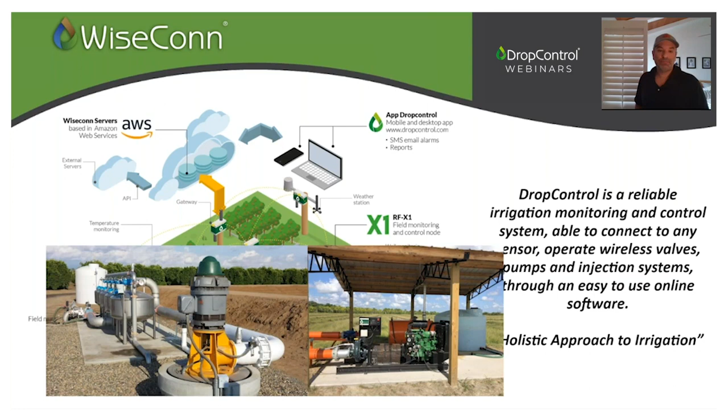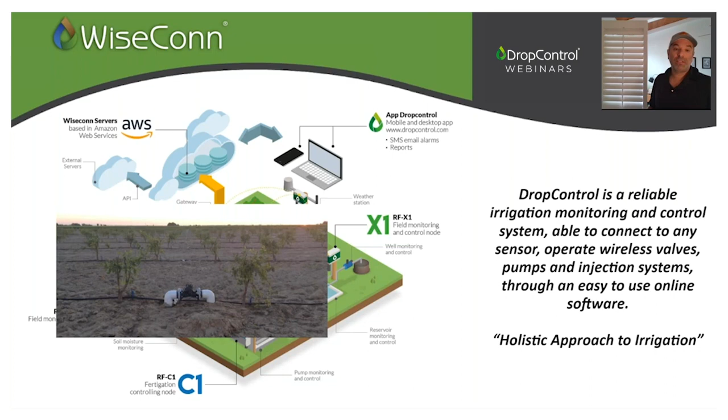The system is capable of taking control of the pumps, either electric or diesel, monitoring your flows, pressures, backflush control, reservoir level control, groundwater level monitoring, energy consumption, anything related with the pump and the filter station. Then, in the field, crucial for efficient irrigation management, valve control and valve feedback, which is key to making sure the system is operating reliably.

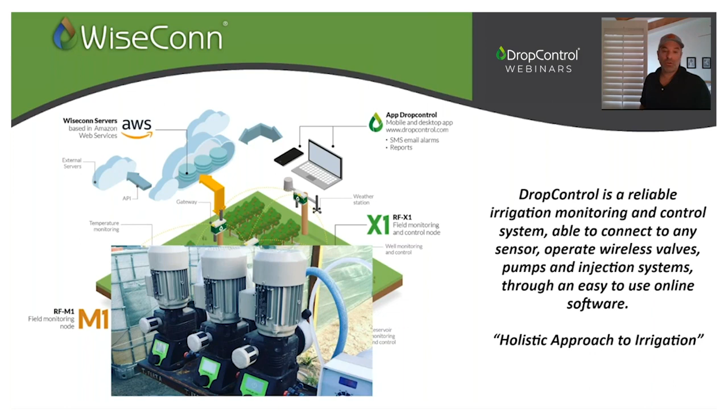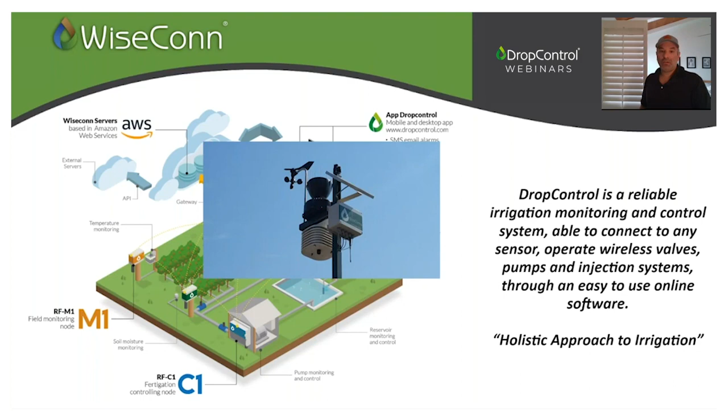Fertilizer injection is very popular nowadays, getting more traction on precise nutrition and fertilizer injection, acid injection. Weather station - again, we're determining and controlling - so we need knowledge of ET, rain, temperatures, all the information relevant for irrigation decision making, including soil moisture sensors, a key part of the irrigation decision making. And then plant sensors in any shape or form - we've worked from leaf temperature sensors to dendrometers, fruit size sensors, NDVI sensors. There's all sorts of sensors on the plant that help make an irrigation decision better.

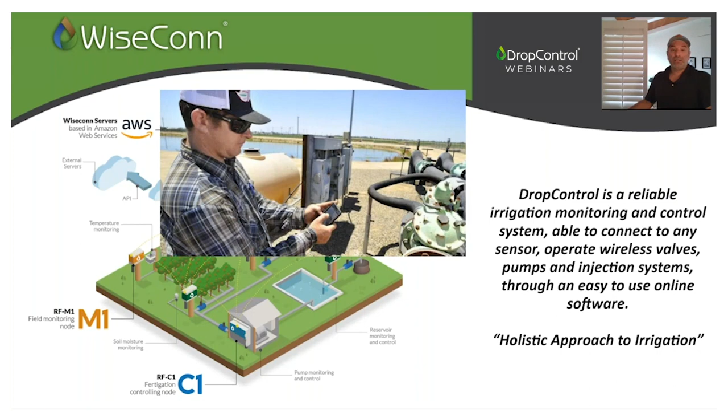And all this from a centralized control on your phone, on the cloud, through a web page. But we also always provide an override, a local alternative. These technologies rely on radios and cellular communications, and the capability of controlling it locally and overriding the cloud lets you irrigate even if the cellular is having issues - Verizon is down, or AT&T or T-Mobile, any preferred brand - then we need to be able to operate our irrigation systems locally.

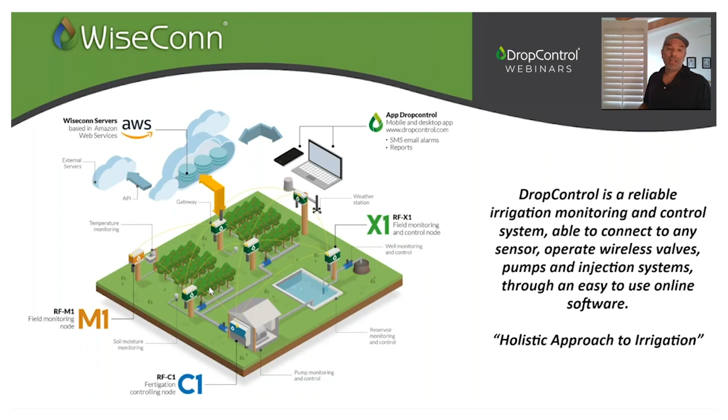Now how this works is we deploy units throughout the field that are connected to the sensors, to the actuators, and they take control of the system. They communicate between themselves through radio, and then one of them, which we usually call the gateway, is connected to the cloud. This unit syncs the cloud with the field - it does not need to be constantly connected or in communication with the cloud. The logic and hydraulic intelligence of the network we've developed and patented is what allows the system to operate independent from the cloud and collaboratively between themselves in order to operate reliably without human supervision.

So the solution is composed of two parts, the hardware and the software. In terms of hardware, we have three models. We've got the M1, which is the monitoring node, and the X1, which we call the flexible node - that's kind of our bread and butter, and we've deployed thousands of units of it. This is the unit capable of monitoring and controlling devices in the field.

And then most recently, we've deployed in the market our C1, the pump controller node, which has more processing capabilities. It's got Bluetooth connection, filter flushing capabilities being released now, and a screen is also coming into the market for local control for those operators that don't have a smartphone. It's got very high fertigation control capabilities in order to do precise nutrition injection for specific crops, substrate, or hydroponics and other applications.

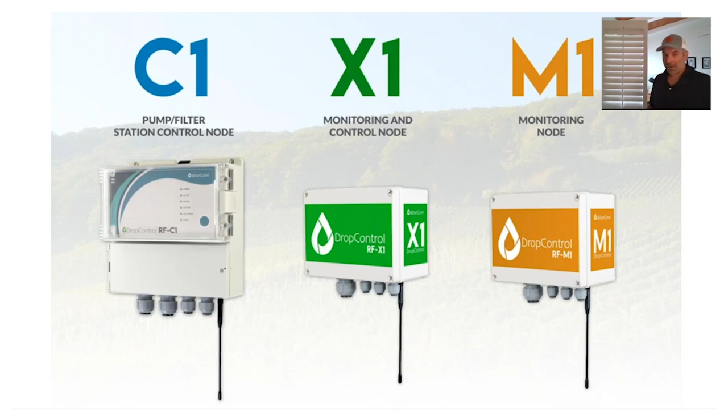So the M1 is the monitoring node. It can be either radio or cellular, so it can go straight to the cloud or be part of a radio network. It can connect to multiple sensors of different protocols. Our system is bare wire, open protocol, so you can connect any sensor to them - you just go in through the cable gland, bare wires into the terminal, so you don't need any special connectors. You can use existing sensors or infrastructure that's already in the field.

We've got a variety of protocols like SDI-12, RS-232, digital, and analog 4-20 milliampere, for example, already included in the node to connect all sorts of sensors on the same unit. The unit incorporates the battery, the solar panel, and the mounting bracket, so you don't have to incorporate a separate power management solution. All of them come with their communication device, solar panel, and battery.

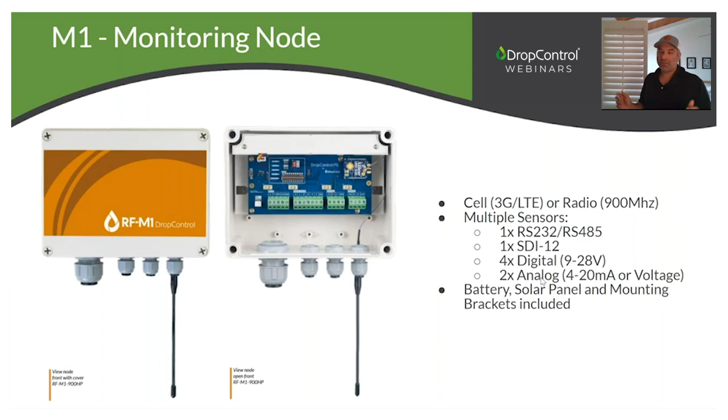Then we've got the X1, which is the flexible node. All of them come with a radio. They can all be part of a network, and they can also be a gateway, so they can be both radio and cellular. This one can be a gateway to the cloud.

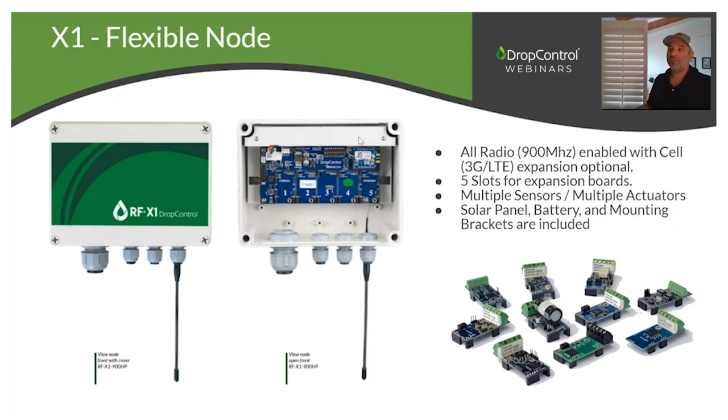It's got 5 slots on it, so you can install different expansion boards with different communication or actuation protocols, including 12-volt DC latching relay control and sensor protocols. It's very flexible in that you can connect multiple sensors and actuators. In this case, the sensor also comes with its own battery, incorporated in the top part. It comes with a solar panel and mounting bracket, so it's ready to go out of the box.

And then finally, the C1, the controlling node, as I said before, is a more intelligent device. It's got more capabilities—it can be radio or cellular or both. It can expand up to 70 IOs. It comes with 10 inputs, 10 outputs, and some analog and serial inputs in order to communicate with VFDs, energy monitoring systems, pressure transducers, etc. It also has expansion modules that allow the designer to incorporate and expand the same unit up to 70 IOs and control up to 5 irrigation systems.

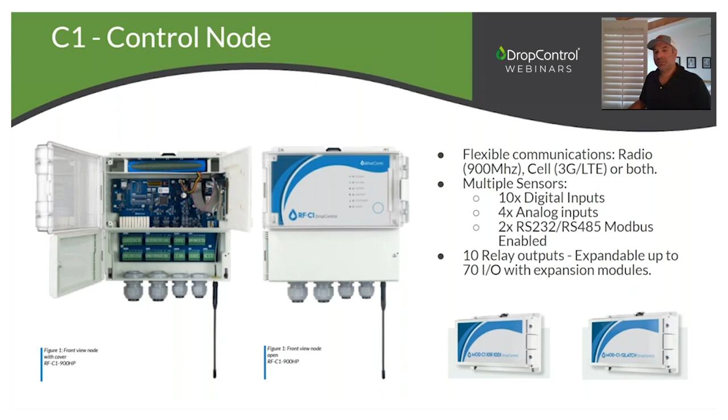And then, of course, we have all the accessories. This is crucial—you're a one-stop shop and have everything needed to get your platform running, so you don't have to go buy antennas or batteries somewhere else. All that is included in our catalog, and you can buy high-gain antennas, extra batteries, extra solar panels, or anything you need to get the system working properly.

In terms of communication, we have bidirectional mesh radio network communication on a 900 megahertz spectrum, so we have a very flexible communication port that we can replace, from 900 to cellular to LoRa to Sigfox, narrowband IoT, you name it. Right now we feel very comfortable with 900 megahertz because of the speed and uptime of the protocol, and then LTE in the US, mainly for the cloud connection. In some countries like Mexico or South America, we use 3G, which is the most stable cellular connectivity in the field. The radio communication has a 2-mile line-of-sight range.

Each node works as a repeater. It's true mesh—they self-heal and repeat, so you can reach up to 20 miles with 10 repetitions. The cell provider can be any provider available on the ranch, because the LTE modem is configured to operate with any of the major carriers.

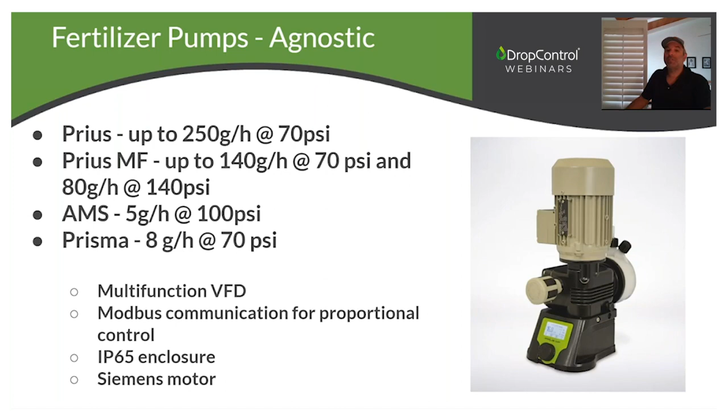In terms of the software, we got the field, as I explained before, connected to the cloud, synced through the cellular network. When you're in the cloud, we have our own app, which I'll briefly show. We also have WOS, the WiseConn Open Service - a free app that our installers and integrators use for configuration and testing. And we have an API to connect to third-party platforms, which has become very popular lately. We've been doing interesting integrations, incorporating the brain into the solution. We don't provide the brain, we provide the remote control, but when we partner with these API companies, we bring in prescriptions and recommendations and close the loop, executing those recommendations in the field. That's the latest thing happening in irrigation automation.

On our side, we have an app. It gives you the bird's eye view of the map of the ranch, your soil moisture sensors, evapotranspiration, irrigation information, and details on what has occurred in the field. You can, of course, schedule irrigation from the app. It also gives you notifications, so a lot of people rely on notifications telling them when the pump started, when it stopped, and if there are any alarms or anomalies in the field.

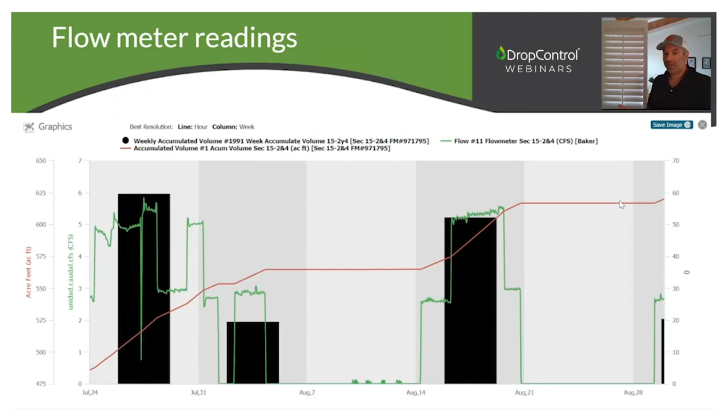And then, of course, there's all the sensor feedback information and flow meter readings. This is a big farming operation monitoring their flows in CFS. In black, you can see the accumulated volume in acre-feet per week, and the red line shows the totalizer of the flow meter in acre-feet, so I can match what my meter tells me with what the software is showing.

We also monitor pressures, doing constant distribution uniformity tests on the main line. By the filter stations, you can actually see the backflushing events. Then on the submains, all the way down to the drip line, especially at further spots or where we designed the system to have lower pressure.

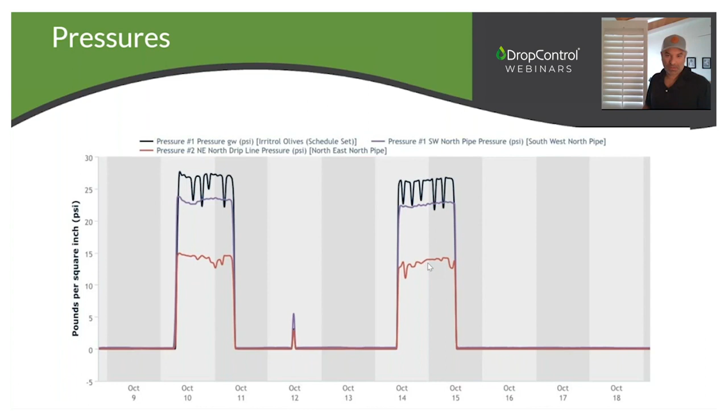If there's a soil moisture sensor or a valve there, you're going to add a pressure transducer to monitor how the pressure is distributing throughout the irrigation system. So moisture sensors for irrigation decision making, determining how long and how frequent you're going to irrigate, and then alarms, getting alarms, texts, emails, even phone calls for frost control.

So if there's a frost event, especially if you're controlling it through water and irrigation as your frost control method, then the system can give you a phone call and wake up anybody that needs to be waking up during the night if they're not ready for the frost control event.

And then finally, on the software side, as I was mentioning before, the new wave is API integrations. We've already integrated with 7 companies that provide different services and solutions, getting to the field through our platform. Companies like Phytech, Semios, Powwow, and FarmItRx provide irrigation prescriptions based on different methods, models, algorithms, and sensors.

They come out with a prescription and send it into our system, and we automatically define a program, a schedule, and then execute it in the field.

And then on the other hand, we've got companies like SWIIM that do water reporting for regulation purposes, or Polaris that do automatic demand response or energy management in order to pump water when it's best in terms of energy cost.

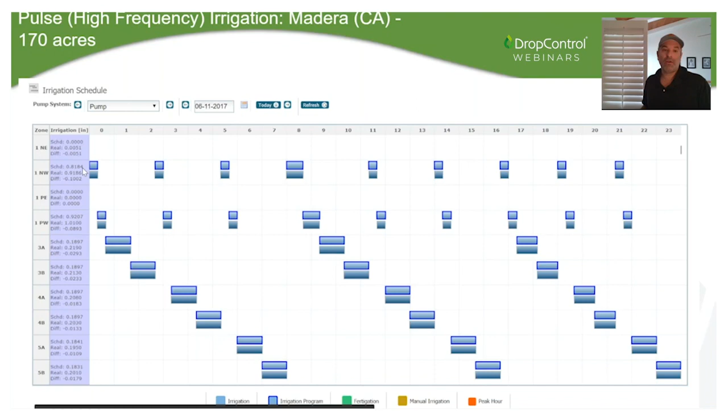So what they did is they started doing high frequency irrigations on 60 valves that they have on 170 acres, operating them several times a day - 3, 4, 5. Now they're even up to 10 times a day on their newer blocks. So this is one day where they were running the adult trees 3 times a day for an hour, and on the younger trees 10 times a day for 20 minutes.

What we've been seeing is that it's a very intense irrigation method. They're basically irrigating, in this case, the first 18 inches. So there's no water there in the deeper soil as an excess or as a backup, but it's very efficient in terms of use. So you're irrigating kind of like substrate, but in soil.

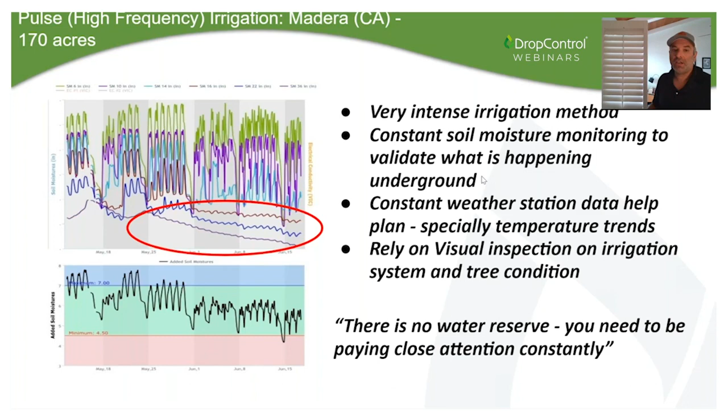Their soil moisture sensors here are very important because they allow them to have visibility of what's going on under the soil and adjust either the frequencies or the durations.

In this case, as I said, it was 170 acres. They're now running with 600 gallons per minute. They have 30% water savings compared to what they were doing before they started with this strategy, and are averaging 3,000 pounds per acre with some trees that are 30 years old.

On the other hand, the grower here experienced a big time savings because he didn't have to go out there and switch sets every time he wanted to change, especially if he was doing high frequency because he didn't have enough water, and that's the strategy he wanted to go with. Basically, it was a full-time job driving around opening and closing valves.

And then the final thing is it's even water - there's no ponding, there's no runoff. These guys are spraying 12 hours after they turn off the water. They're harvesting the day after they turn off the water. So yes, there's not a lot of water excess in the soil, so you have to pay close attention.

But on the other hand, it gives you very good benefits of being able to work on the field only hours after irrigating. And these are some pictures of UC ANR and the almond board visiting the field and validating that this irrigation strategy was successful. The trees were very happy and the water use was below the average.

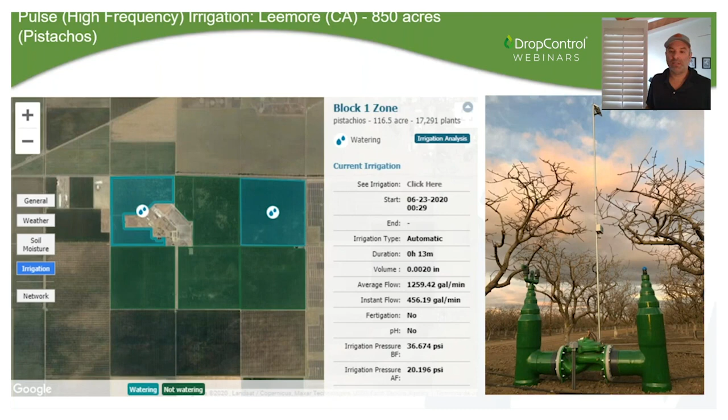So after that, other guys started to jump in with big blocks. This is an 850-acre farm that has 150-acre blocks, and they do also pulse irrigation. They went from once a week to twice a day, and what they've seen is a 50% water savings on their results. But most importantly, they improved their production by 38% on the off years. So now they have a very constant production on pistachios, and they're producing around 3,000 pounds per acre on average.

This is another example, out of the high frequency - now we go to per variety on almonds. There are different varieties, so basically automation allows you to separate the pollinators from the non-pollinators, and you can irrigate them separately when you're harvesting or shaking. So the piping and the design, of course, needs to be set up for this in order to be able to open and close the valves depending on which variety you want to irrigate at that specific time.

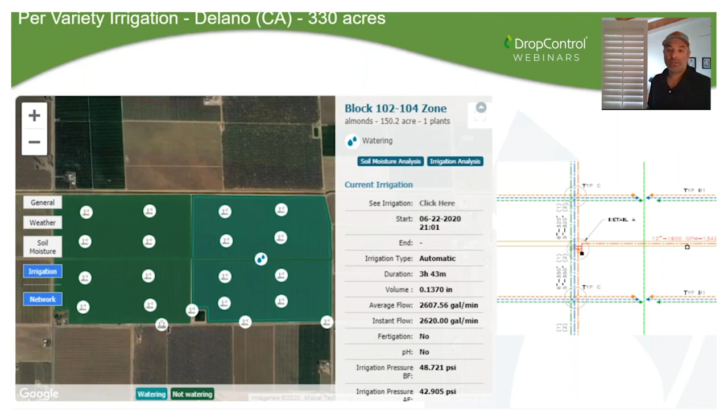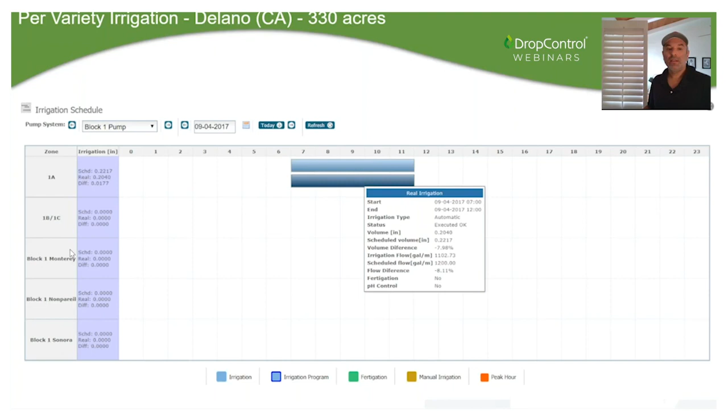So as you can see here, we have the blocks on the left, and these guys divided the ranch into two blocks, blocks 1A and blocks 1B, C, but then also they have block 1 Monterey, block 1 Nonpareil, and block 1 Sonora. So they have the capability of scheduling it to run as a block or per variety.

And just to be sure, this is a ranch that has 75 valves on it. So these guys decided to go with a pressure transducer after each valve in order to check that the pilots and the pressure regulation were constantly operating correctly according to their calculations, just by monitoring the pressure after each valve.

If a valve loses pressure and the pilot is not regulating accordingly, you can't tell until the trees start showing it. So just by being able to identify that change in pressure regulation, which happens ahead of time or as soon as it happens, you can correct it immediately, and the economic impact of that pays for the transducers, the service, and most of the system.

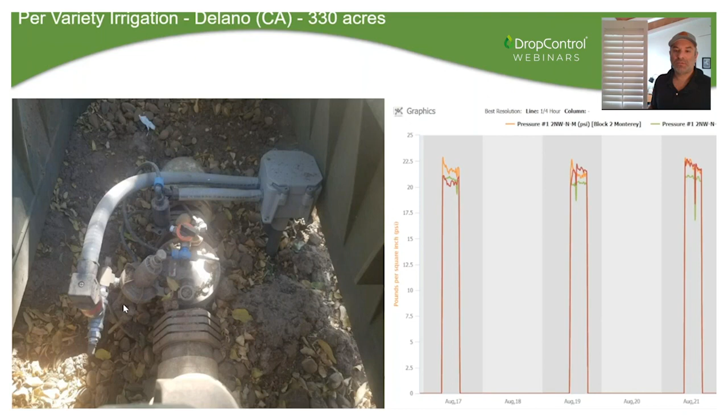This is another case that we've operated in the last couple of years: valve sequential operations in Winters, California. This is also almonds. In this case, we found that we had two pumps, a north pump and a south pump on this ranch. The main pipe was on the west. It was a big pipe, high velocities, and the variable frequency drives were connected on both the electric and diesel.

What happened on this ranch is that the filling of the pipe and the actual block was from west to east, so it took a lot of time. And the velocity of the water, given how big the pipes were and how it was designed, had pressures going all over the place. So what would happen is the operator would start the pump, open the first 4 valves of the block, and then when he needed to change the set, he would open the other 4 valves and then go close the first 4.

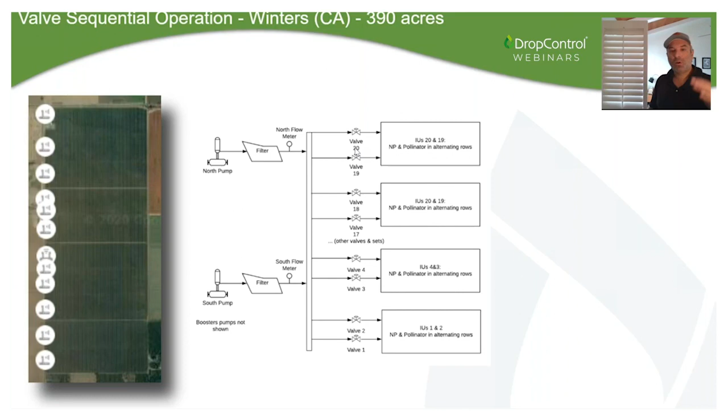So what started to happen in those cases is the pressure would drop, the VFD would ramp up, velocity of the water would go higher, and it would take up to 30 minutes to get back to a regulated pressure on the main, on the whole system.

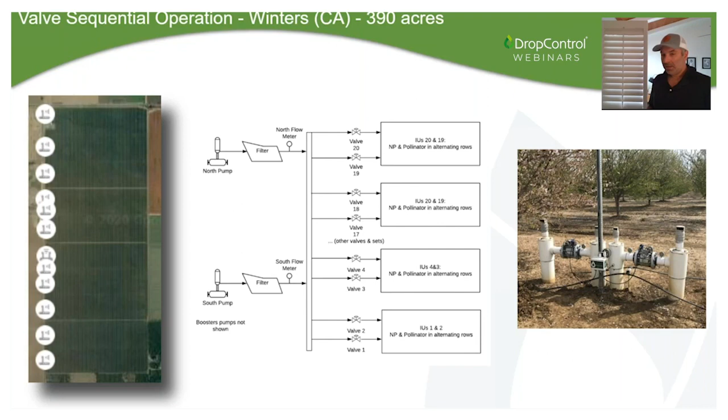And these people were looking into doing high frequency irrigation as well. They wanted to do 1-2 hour sets, and when you're doing that and you've got 30 minutes to stabilize your pressures, it doesn't work. So the field was not doing very well.

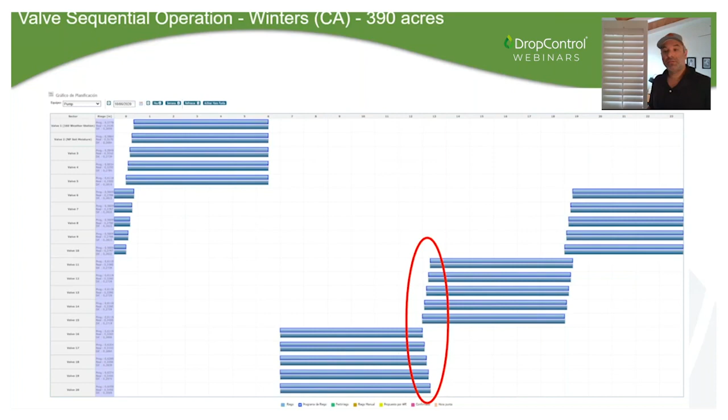What we decided to work out with them was a sequential operation, meaning you open the 5 valves and then start switching them one at a time. You open one and close one, then 5 minutes later open one and close one. That sequential operation allowed the pressures to stabilize and the system to always run at full pressure, which is what the emitters needed.

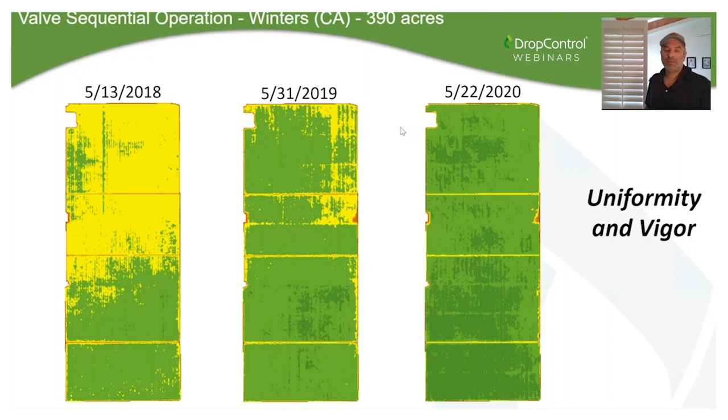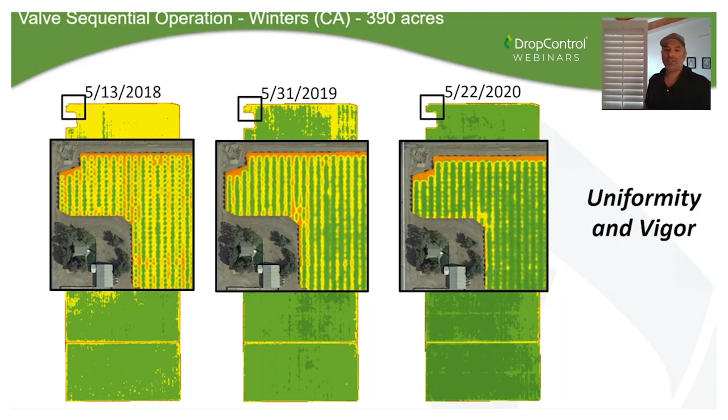This was installed mid-season 2019, and we can see the vigor today. This is an image from the last 3 years in May. It was absolutely incredible, and the ranch had very good results in terms of harvest. It was even, the canopy, everything. Really good results just by doing a tweak on the operation of the system, by incorporating automation, and the economic results were incredible.

So they had that capability and intelligence just by using one node in order to feed the water tank and feed the irrigation system, and of course control the valves in the field when they wanted to irrigate the 4 blocks.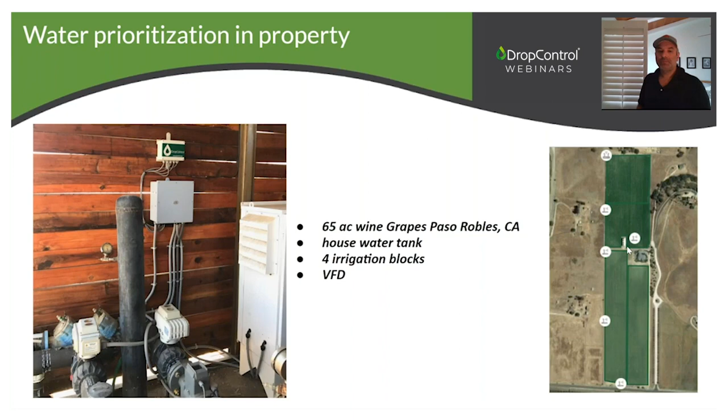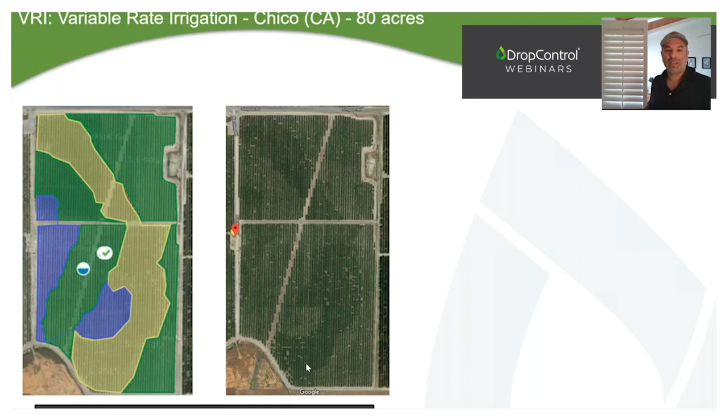Another thing we've seen, I was talking before about high frequency. The other good use example is variable rate irrigation, or VRI, where we've been seeing growers, especially on their new setups, build their irrigation systems and ask the installers to design the irrigation system matching the soil type. You can see on the sandy soils that yellow stripe going across the field. And here on the picture on the right, from Google Earth, we can see that block had been irrigated right when the picture was taken, so that's why it's wet. So the irrigation system matches the soil type.

That has proven to be a very good investment. It does not cost a lot more to install an irrigation system like that, it's not a dramatic difference. We've seen everything from 10 to 25% difference in the cost of the initial investment, but the results are incredible. You're now irrigating your sandy soils with high frequencies and shorter durations, and your heavier soils with longer durations and lower frequencies, and your ranch, the trees, and the crop basically look even. This farming operation started off with 80 acres and then converted around 1,000 acres to VRI because of how well it performed in the field and the trees.

This is another example of a strategy using automation and monitoring, again a complete water irrigation management approach. This is walnuts in South America. Some of these are actually planted on hills, and that's another topic - if anybody wants to talk about that or has questions, I'm happy to answer outside the call.

What these guys did, or what we worked out with them, was basically changing their irrigation strategy on post-harvest. Right now we're in the middle of post-harvest. What I've seen is a lot of people trying to put a lot of water on it because of the stress the trees went through for shaking. I've seen a lot of people wasting water because they're running long runs, which only makes the water percolate and not really get used by the tree.

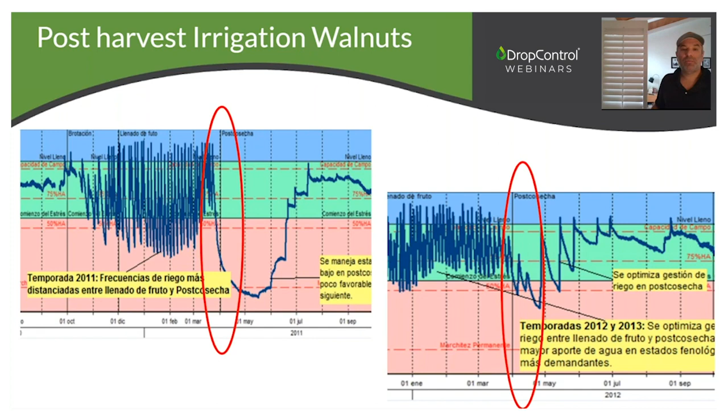Instead, here's what we did - the difference between 2011 and 2012 on a soil moisture sensor, where we can see right at harvest they stopped the water and didn't start it again until the rain hit. The year after that, we did some post-harvest irrigation but didn't soak the soil - instead did several irrigation events to make sure the tree could drink as fast as it could to recover from stress. Over a 2 to 3 year period, 2011 to 2013, it was a process, but the root development was incredible. Since the tree didn't have fruits anymore, all the energy went into developing roots, and the results were amazing just by managing post-harvest irrigation.

Finally, this is an avocado ranch I like to show. This is a very interesting case study we worked on as well, because we had two different blocks - a control and a treatment. We controlled one with the soil moisture sensor and higher frequency irrigation compared to what they were doing on the rest of the ranch. We could see that the harvest was exactly the same - both blocks got really good harvest, about 20 tons per hectare in this case.

But you can see the water use on scale. This is 400 millimeters, so there were months they were hitting 300 and something millimeters, where on the treatment side we never passed 200 millimeters a month. So it was basically 50% less water with the same production. And when you're irrigating hills with the energy cost, this was a big impact on this ranch.

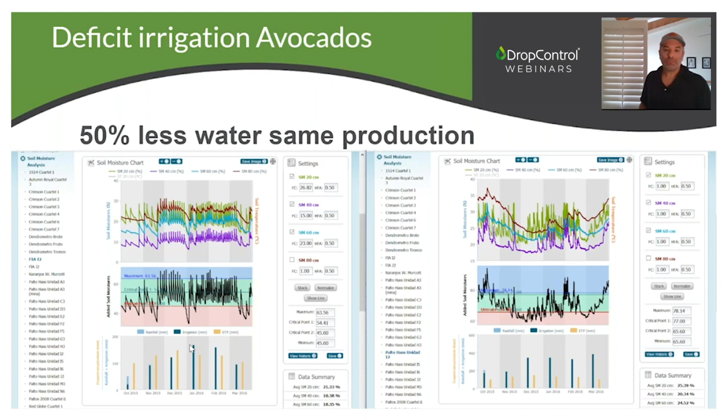And then finally, regulations are coming, or are here - SGMA for California people, the Sustainable Groundwater Management Act. We've deployed by now hundreds of well monitoring systems. Same thing we're doing in Chile, in South America, and in general, where governments are starting to put regulations and online monitoring on wells. So that's also part of this holistic approach, where I'm monitoring my water source, managing my wells, running the wells that are more energy efficient or that have more water availability, but being able to report and have all the information I need for regulatory purposes.

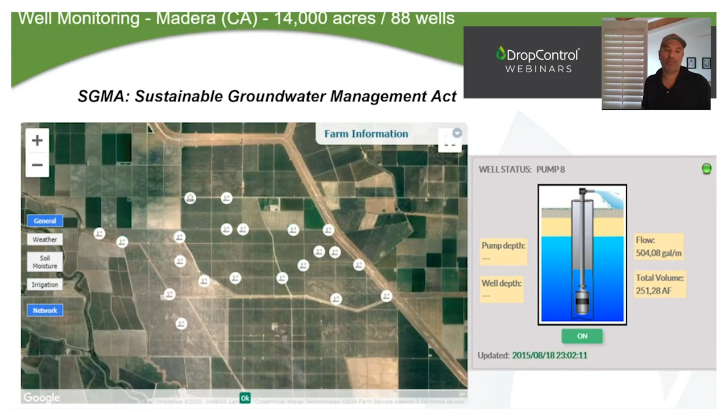Okay, so that's some of the information considering what is automation, how do we use it, some example cases. And here I added some slides that are more targeted towards the irrigation business people that are looking into what they need to consider when they're thinking about adding this business line to their operations.

The first thing, as I've already mentioned, is understanding the ROI. This is usually very competitive in the irrigation project. On an ag irrigation project, this might account for anything between 5 and 15% of the project, but the impacts are huge. What we've seen is that the water savings, energy savings on pumping, labor savings—because now you don't have people running around opening and closing valves—and the ultimate impact of increasing the yield and the quality of the yield pay for the system in less than 2 years.

So we've seen anything from 5 to 10% increased production, all the way up to the walnut case I was showing on post-harvest irrigation management. Those guys increased their production by 30%. They had to use more water, yes, but the production paid for the water and everything else.

But on most cases, what we see is something between 20 and 30% water savings. And that's all the costs around irrigation water, meaning energy, labor, pump depreciation, or irrigation system depreciation, etc. So this is generating very big impacts on farms, and this is here to stay. I've heard from growers that they want to work with irrigation companies that are already working with automation systems, because this is the way things are going to go, especially on new developments.

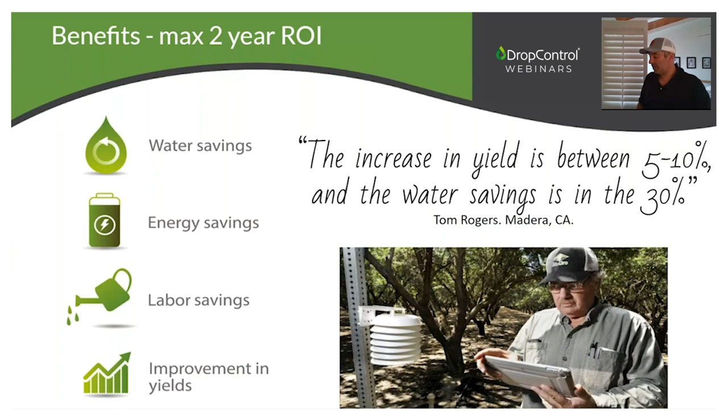What to expect from the manufacturer? This is very important and it's overwhelming. There's a lot of solutions out there, there's been a lot of smoke in the air—companies coming out of Silicon Valley without real knowledge around the problem, the ag and irrigation. So it's very important to understand and decide who you're going to work with and who your vendor is going to be. These are the considerations I think need to be taken for making a decision.

First of all, the equipment needs to be reliable and durable. The reliability and durability is what the grower expects. The grower expects a tractor to last 20 years, an irrigation system to last 20 years. So we're talking about systems that have a proven track record, that have been in the field, the technology has been validated, and they have at least 5 years of operating examples. Because that is a must, a requirement for you to be successful in this business.

Then simplicity, as I was saying before—having a solution that has Spanish available on the app, that is simple to use by the irrigator and by management on a farming operation, that there's a training process and training material. Not that they're going to ship you a system that isn't finished, that doesn't work, that they can't train you on how to use, or nobody really knows how it works because it comes from somewhere overseas. It needs to have training material and a clear training process to teach you, as an irrigation distributor or installer, how to install and operate the automation system.

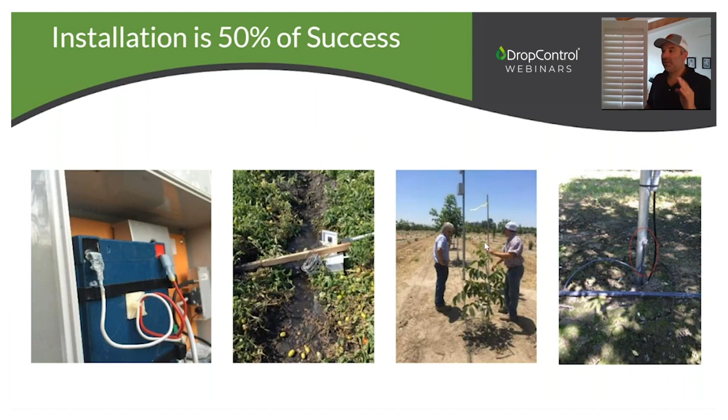If not, you're going to have to go back there again and again to make fixes. We've seen this left and right. We've seen boxes being left open, and so corrosion comes in. Hopefully not using lead batteries anymore -- those are out of the game. Using 2x4s to install a node, yeah, that's not going to last long. Or installing soil moisture sensors on a sick tree. Those are the kind of things we need to pay close attention to, because installation is 50% of the success of the project.

So as I was saying before, cluster valves make it economically viable, better for the grower. We've gotten to the point where this is very competitive, if not more cost effective than running wire to control valves in the field. And the nodes are capable of controlling up to 9 valves each. So there is a component of design there to make a better economic decision on the blueprint.

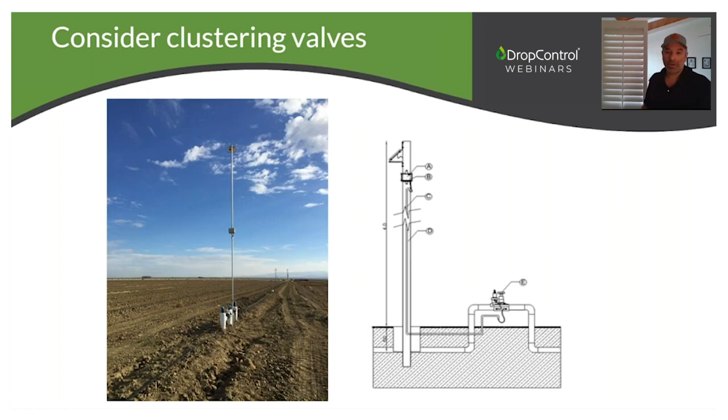And then finally, as an irrigation dealer, understanding and incorporating soil moisture sensors into your equation. This component is crucial for irrigation decision making, for how long and how frequent to irrigate. Now, we are not asking distributors to teach growers how to irrigate or how to use the sensors, but to know how the sensors work, how to install them, where to install them, and do a good job at that. The grower will learn how to use it, or have a consultant, or hire one of these third-party artificial intelligence companies to provide an irrigation recommendation. But the sensor is a crucial component of an online irrigation management system.

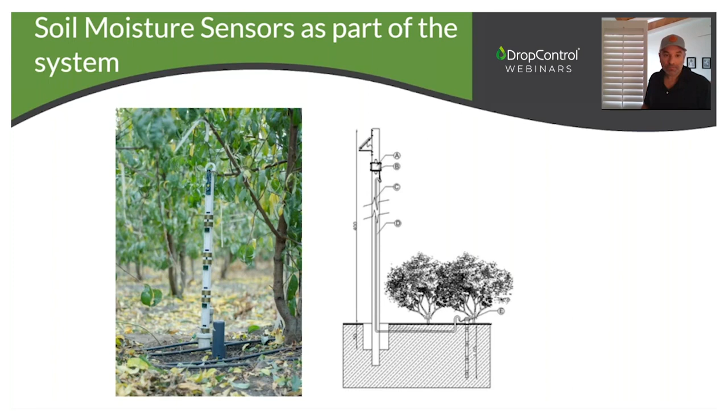Okay, I'm going to run through this fairly quick so we don't run out of time. Pricing, we got very competitive, as I was saying before. The M1, the monitoring unit, is a unit you can get anywhere between $650 and $950, with a subscription of $150 a year. So very affordable for the grower, very competitive with any monitoring-only solution out there in the market, to put a flow meter, a well, a weather station, or a soil moisture sensor.

That's available, it's competitive, and most important, it's compatible with controls, which is the next step on this kind of platform. Then the C1, the controlling node, fluctuates between $2,500 and $3,000. It's a full controller, but we still make it very competitive -- slightly above what would be a smart turf timer, but considerably lower than some of the control solutions out there selling for tens of thousands of dollars.

And then finally, the X1, which is the flexible node, fluctuates depending on whether it's radio or cellular, or how many expansion boards it has on it. So it fluctuates between $850 and $1,500.

And that is basically the unit that goes in the field.

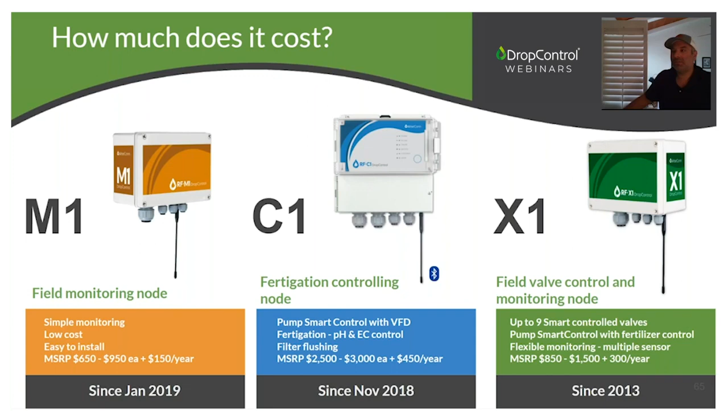Overall, we end up seeing that the cost of investment of an automation system, including the sensors and labor, fluctuates between $200 and $300 an acre, sometimes less, sometimes more. I would say an average of $200 an acre. The expansion modules, both the expansion boards and expansion modules for the different models, are in the hundreds of dollars.

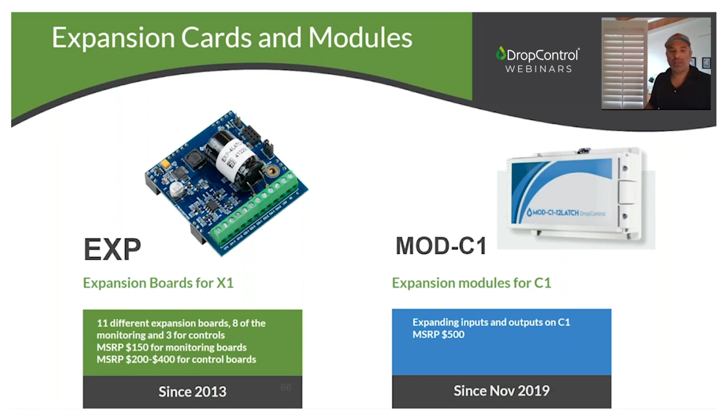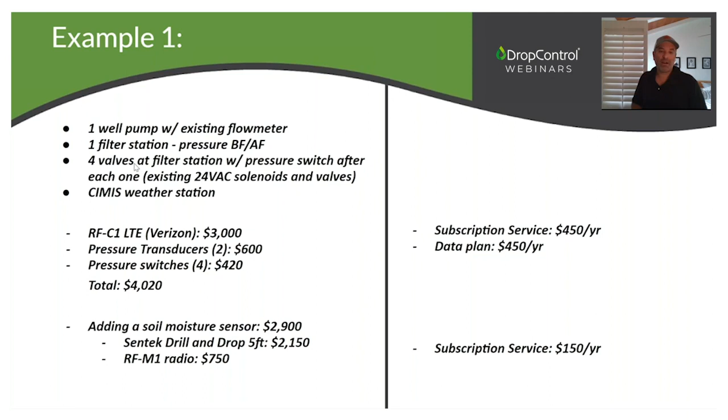As an example, I got here a well pump that has an existing flow meter with a filter station. We put a pressure sensor before and after the filter. It's got 4 valves right there at the filter station, and we add pressure switches to make sure the operation is correct. We also add a CIMIS weather station, considering it's in California. A system like this would need an RF-C1, a couple of pressure transducers, and 4 switches, ending up being a total investment of $4,000 in equipment.

And if you add a soil moisture sensor, considering a Sentek drill and drop and an M1 unit out in the field, you add another $2,900, with a subscription service of $450 a year, a data plan of $450 a year, and the M1 subscription fee of $150. So we're talking about $1,000 a year on subscription fees. Very affordable, very competitive with what's available in the market.

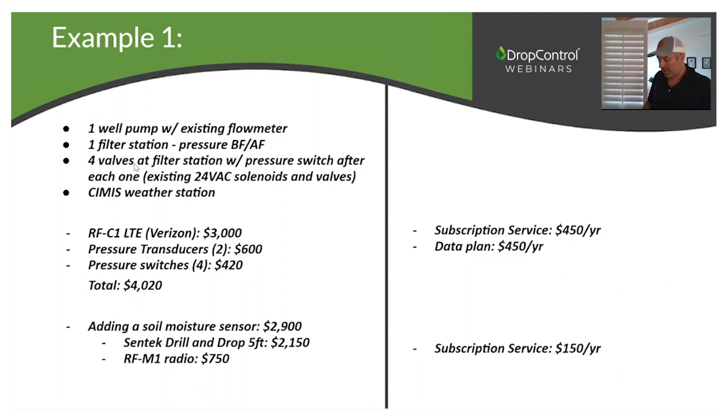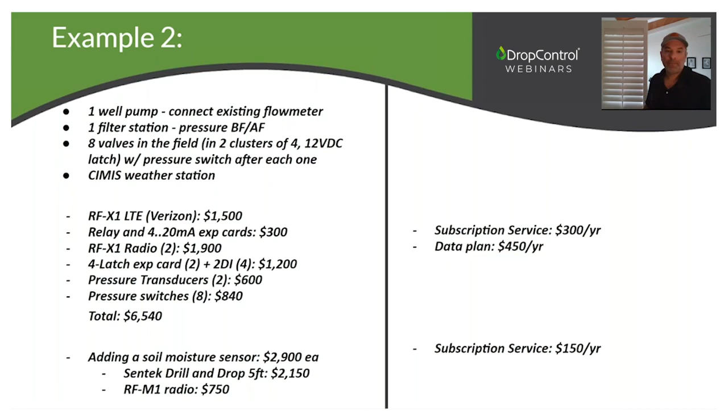Finally, touching on the topic of marketing and funding, this is pretty important. We have been working a lot on positioning our company as the precision irrigation alternative out in the market. Precision irrigation, precision nutrition. It's very important that it's robust, reliable, and durable, flexible, because it connects to other sensors. A lot of sensors connect to third-party software, so it's very flexible on the integration of all sensors and software.

Affordable, because this needs to be in the range of what a farmer can pay, especially in the range of the irrigation industry business. And locally supported, because we work with the local irrigation dealer for that grower, and that's what we're looking for - that local grower going to his local dealer to buy the automation system. What we're doing is training that local dealer to be knowledgeable on these systems.

These are California examples, but this applies throughout the US and throughout the world. We've seen that there are a lot of incentives for these water-saving technologies. Here in California, PG&E has several programs. The most famous one that we've used the most is ADR, Automatic Demand Response, and they basically provide money for the investment and then provide a rebate to the grower when they participate in the events of an automatic demand response. Then a very popular one, NRCS, through the EQIP program, through their different offices, are offering money both for soil moisture sensors.